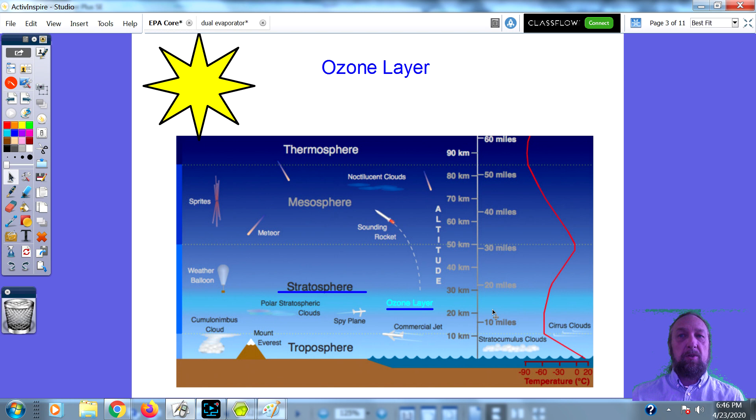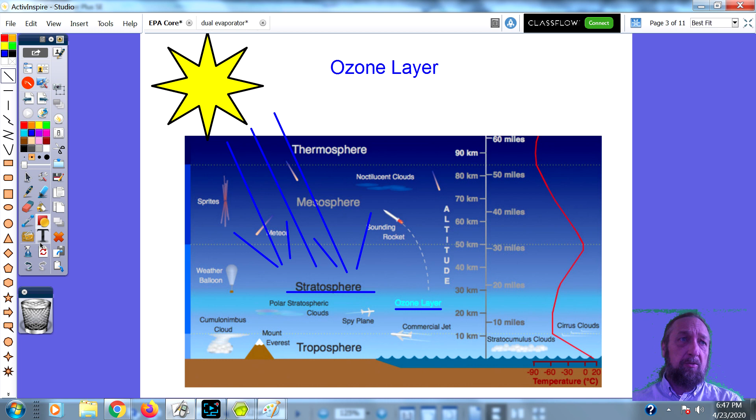So ozone, as thick as it is, stands about 7 to 10 miles above the Earth, and you can see where this little light stripe is right here. This area is where the ozone layer is. So as the sun's rays are penetrating into the Earth, these ultraviolet rays here are trying to get into our atmosphere. But when they hit the ozone layer, they are reflected out and away from the Earth. So it protects us. And what are we concerned about? Well, the ozone layer protects us from the ultraviolet light. Ultraviolet light can cause all kinds of problems. It can cause skin cancer.

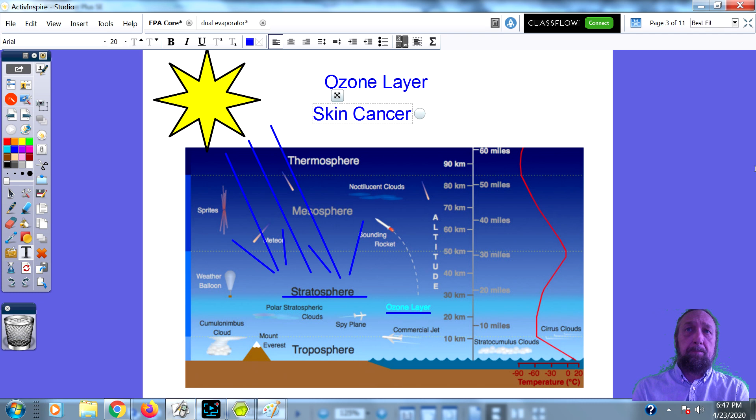They can cause cataracts, and I think it's spelled that way, cataracts. It can reduce crops, and it can reduce marine life. So in other words, too much ultraviolet radiation is no good.

I just installed one of those UV lights in the air conditioner in the office because of this COVID virus, and I was trying to kill the germs in the AC by using an ultraviolet light. That is how they do it on air conditioning units. And I got a little UV handheld wand. It looks like a lightsaber from Star Wars. And you hold that over the keyboard for like 10-15 seconds, and it kills all germs. So that's a good thing about the UV.

But the skin cancer here is probably one of the worst things that could happen. You go out in the sun, and if you get too much sun, they say, oh, you're going to get sunburn, be careful, you can get skin cancer and everything else. So if you pay attention to the news, sometimes in the summertime they'll tell you the UV rating is this or the UV rating is that. That's based on how thick the ozone layer is.

So what is happening? Ozone has 3 parts of oxygen like you see here, and Freon contains chlorine in some of the Freon that we have, R12, R22, R11, R500. All these refrigerants are made up of different types of chemicals, but they all contain some sort of chlorine atom inside of it.

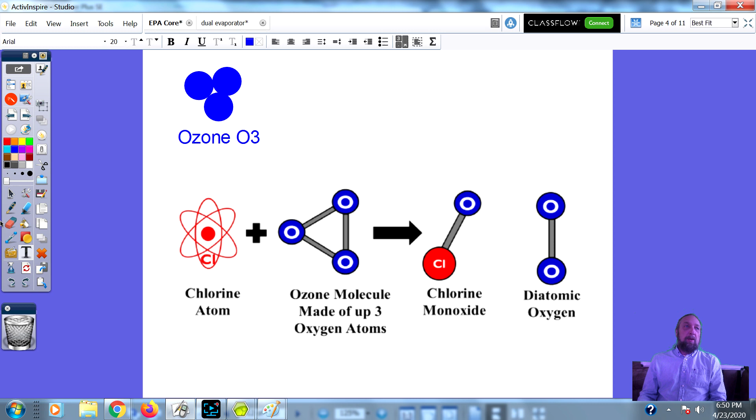Now they're saying that this chlorine atom can destroy up to 100,000 ozone molecules. Okay, so this chlorine atom meets here. This oxygen meets another oxygen, becomes an O2. Then the chlorine itself comes right back around and breaks up another ozone molecule and steals another oxygen atom out of there. And this can happen up to 100,000 times.

So if you're writing this down, this is the stuff you need to know for the test. You need to know it's chlorine that messes up the ozone. The ozone's made up of 3 oxygen atoms, and chlorine monoxide is the chemical formed when 1 chlorine atom is mixed with 1 oxygen atom. So chlorine monoxide, mono meaning 1 oxygen. And you need to know 100,000 ozone molecules can be destroyed by one chlorine atom.

And that sounds like a lot. If I gave you $100,000, that'd be a lot of money, right? But you cannot physically see an atom with your eyesight. You have to see it with a microscope. So 100,000 atoms, I don't know how much that is, but I would gather to say it's about the size of a ballpoint pen. It's not really as big as you think it is. But if you get enough chlorine out there and multiply it, instead of being 100,000, it's millions and millions.

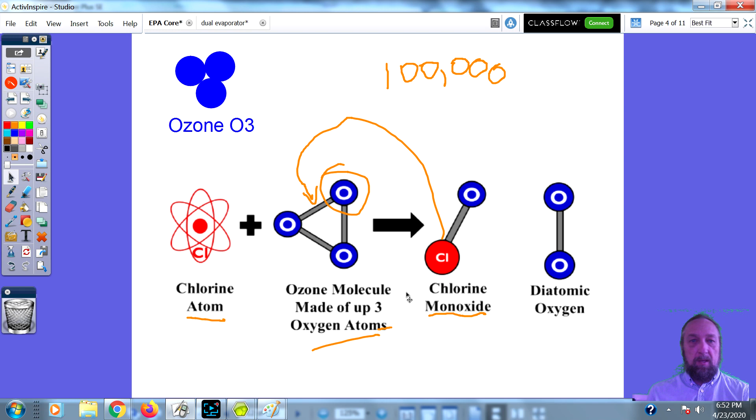Now, what makes ozone is usually lightning. An electrical charge: if you were ever close to a lightning strike, you'd smell a little bit of a pungent smell. That is the electrical charge in the air fusing oxygen atoms together to make an ozone molecule. But ozone at Earth level does not protect us. We need that ozone at the stratospheric level. So it's not that easy to replenish, but it's not that the entire world has a hole in it; there are spots in the ozone layer that are thinner than others, and ultraviolet radiation can get in.

So let's take a look at a couple of the questions here in the exam. The first question says, which of the following gases help form the Earth's protective shield? So what's the answer there?

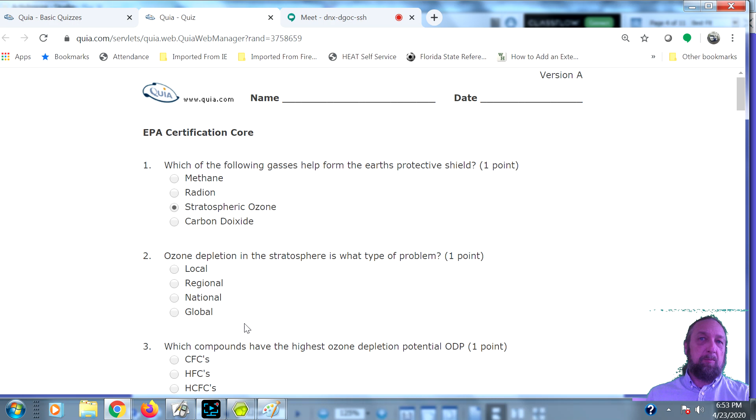That's the same. It's stratospheric ozone. Okay? Now, ozone depletion in the stratosphere is what type of problem? Global. It's a global problem. Okay? Now, let's talk about ozone depletion potential. I have that in my presentation.

Refrigerants ozone depletion potential. We have CFCs, HCFCs, and HFCs. And in our old paperwork, those were the only three refrigerants that we talked about. But now we've added HFOs. That's 600A. Now, CFCs are chlorofluorocarbons, and those are refrigerants like R11 and R12. We don't use them anymore. They've been phased out and they've been replaced.

Do you know what they were replaced with? Isn't it butane? Well, what freon do we use in a refrigerator? 134A. R134A. So yeah, the R12 was replaced with 134A. Okay? Now we have HCFCs, and those are like R22, R502, and some of these other refrigerants.

What about R600? Isn't that new? Okay, that is part of the HFOs, and I haven't got to that yet. Before I get to the HFO, I want to talk about the ozone depletion potential on this screen. The higher amount of chlorine that a refrigerant has, the more ODP, and you're going to see ODP here, and that's short for ozone depletion potential. So the higher ODP, the more chlorine that's found in that refrigerant.

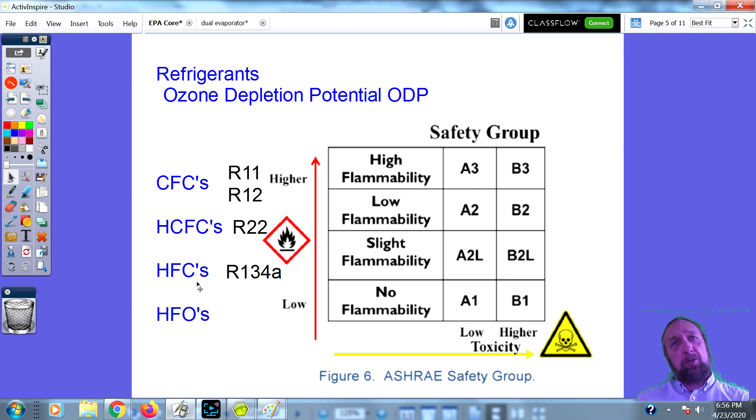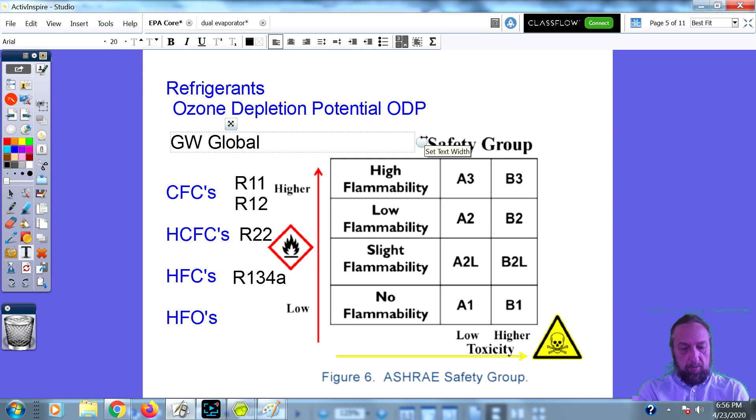But the problem with those refrigerants was they didn't harm the ozone, but they had what they call GWP, global warming. Now, global warming is not the same thing as ozone depletion. Ozone depletion harms the ozone layer and allows ultraviolet light in.

Global warming is something called the greenhouse effect. The sun heats up the earth, and that heat's supposed to escape back into outer space. But if we have refrigerants trapped in layers of atmosphere above us, it keeps that heat in, almost like putting aluminum foil around warm food to keep it warm. So the sunlight heats up the earth, and the earth gets warmer. You hear a lot about presidents and everybody saying we've got to worry about global warming. So we don't want to let 134A out into the atmosphere.

A lot of people say, well, if it doesn't have chlorine, it's not going to harm the ozone, why worry about recovering that refrigerant? But it affects global warming. So HFOs were invented, and that was R600A. These refrigerants have been around in Europe for almost 20 years now. They contain isobutane, which is what's inside your lighter, and that's very flammable. Its flammability was not that high, but its global warming was a lot lower than R11, R12, R22, R134A. That's one of the reasons we're now changing from 134A to 600A.

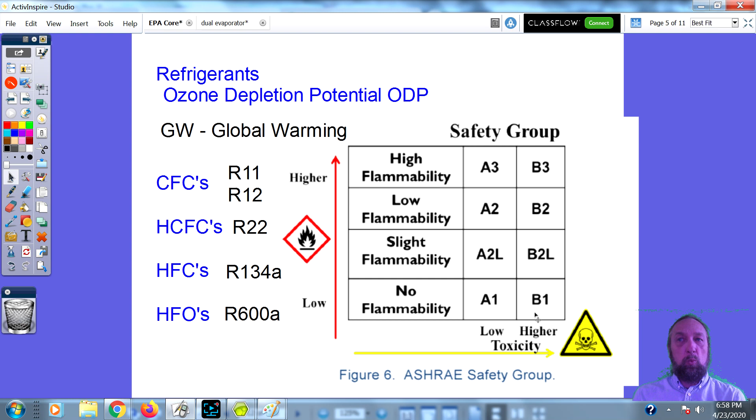Now let's take a look at this chart over here. This chart talks about flammability, and down here you've got what they call toxicity. All of these refrigerants, HFCs, CFCs, and HCFCs, are what they call an A1 classification, except for R123. That is a B1 classified refrigerant. I'm going to put that up here, because that will probably be a test question. R123 is a B1 classification. It means it's a little bit toxic. It's not going to kill you if inhaled, but it can cause serious respiratory problems.

With A1 refrigerants, if I let Freon into the air, and I don't totally replace the oxygen with Freon so you pass out, if you inhale it, it's not going to harm you. It's odorless, it's colorless, and it's not toxic to you. So in the column on the left, A1 is the safest refrigerant, but as we go up in numbers, we've added flammability, where A2L is slightly flammable, A2 is low flammable, and A3 is highly flammable.

R600A is an A2L. I haven't seen the new test myself, but you might want to jot this down, that R600A is an A2L. So it's slightly flammable. If you let it out, it'll burn, but it's not supposed to be really high explosive or anything else like that. So most refrigerants are A1 except for 123, and 600A is an A2L. You need to know those two numbers for the EPA test.

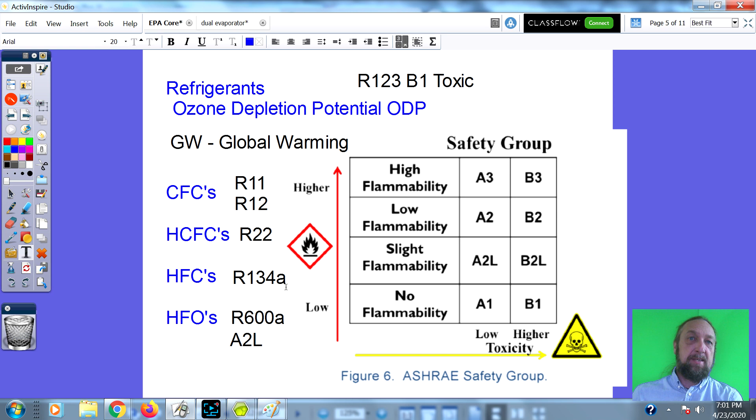So going through here, let me just see, drop-in refrigerants. Let me talk about that next. When you're working on a system, and that system has R12 in it, and I said that 134A is now being used instead of R12. So 1970s, 1980s, 1990s, we made refrigerators with R12 gas inside of them. And then the government said, hey, no more R12. So manufacturers had to redesign their refrigerators to use 134A. So they stopped making R12.

Well, R12 and R134A use different types of oils, and those oils can't be mixed. So if you were working on an R12 system and it had a Freon leak and you took a torch and soldered up the hole and fixed that leak, and you don't have R12 now, you technically can't just put 134A in. Or if you're low on Freon, you couldn't add a little bit of 134A. If you do that, you end up mixing the refrigerants, and you're making something called a blended refrigerant.

So going to drop-in refrigerants, when retrofitting or converting a system to use a different refrigerant, only EPA-approved substitutes can be used. Remember, EPA does not approve any substitute refrigerants as direct drop-in replacements to service an R22 or other system. So let me just do a search here for an R134 blend equivalent. Okay, so R134 is a refrigerant, but you might find some of these other gases that are very similar in pressure and can be used similar to 134A.

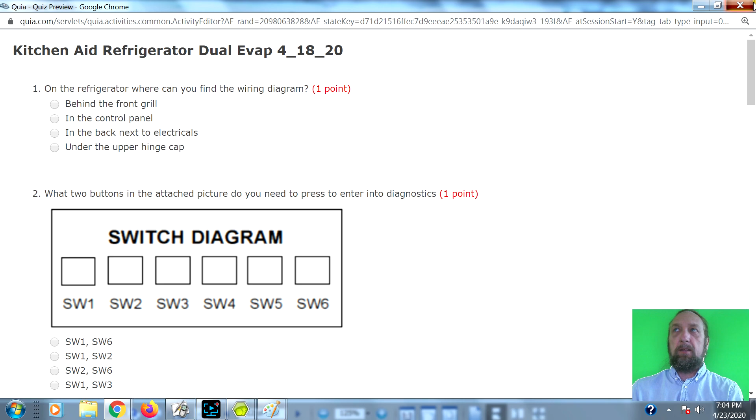I'm going to close this one. If we're looking here at the quiz, which compounds have the highest ODP? CFCs, HFCs, or HCFCs? Anybody? HFCs? CFCs. They might add HFO as an option in here as well. Which refrigerant contains CFCs? I gave some examples. If you look at the presentation... I didn't write it down. Oh, no. Is it R22? 500. Did you say 500, Gerald? That's correct. Yes.

R500 is a CFC. An example of a CFC refrigerant is, and it was on that list, what was an example? R22. No. Another guess. R12? R12. What about an example of an HCFC refrigerant? I'm looking on the slides. I'm sorry. So it's R22. Well, what's the question? HCFC is R22. Very good. Which refrigerant is a chlorine-free refrigerant? Just look at the name. The first C in the name was chlorine, and the second C was carbon. Which one of those doesn't have the chlorine in it just by the letters?

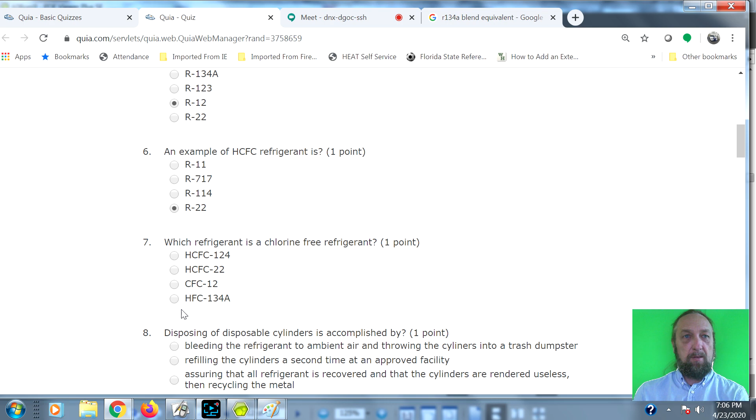Gerald, minimize. Turn off your microphone. You're getting noise in the back.

Okay, so let's go back to the presentation. So you can see the types of questions they're going to ask you is which refrigerants are CFCs and HCFCs. A lot of the temperature pressure charts, and I think I emailed you guys one, right? Yes. Let me go to that temperature pressure chart if I can open it up.

Chris said he's not going to be able to make it, by the way. Huh? Chris said he wasn't going to be able to make it.

Okay, no problem. So look at this temperature pressure chart. Look, HCFC, HFC, HFO, CFC, HCFC, HCFC, you get the point. So HFOs don't have chlorine and HFCs don't have chlorine. You don't have to memorize the letters and the numbers because you are allowed to use a temperature pressure chart when you take the test.

So if I give you a copy of this for the test, you have to say, oh, which one doesn't have chlorine in it? It would be 134A, 600A, 1234YF, and 1234ZE. All those don't have chlorine. So if they're one of your options in the test, if you learn how to read what these letters stand for, you don't have to memorize which one of the numbers are the refrigerants that have chlorine and don't have chlorine.

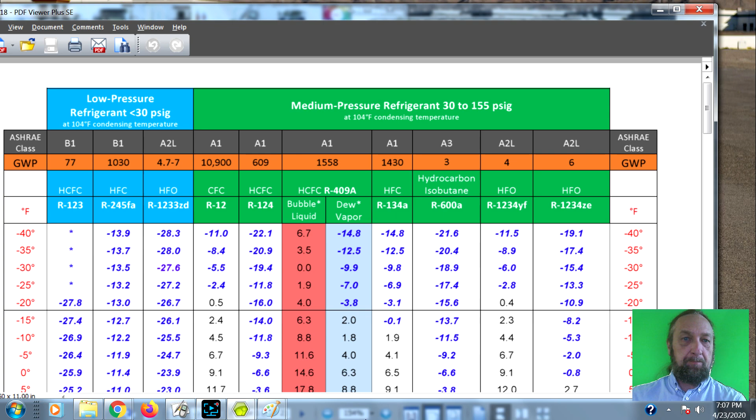Also, this 1233ZD is also what we call an HFO, which is a hydrofluoroolefin. So let's go back to here. Disposing of disposable cylinders. So when you buy Freon and it comes in a tank, that tank is a disposable tank. That tank cannot be used for recovering.

Sometimes back in the day, guys used to take and use them for air tanks. They'd pump air into it, and if their bicycle tire got low on air, they'd use it to fill air. But they're very dangerous because the valves inside of them aren't designed for charging and letting the pressure on and off. So disposable cylinders are what they are.

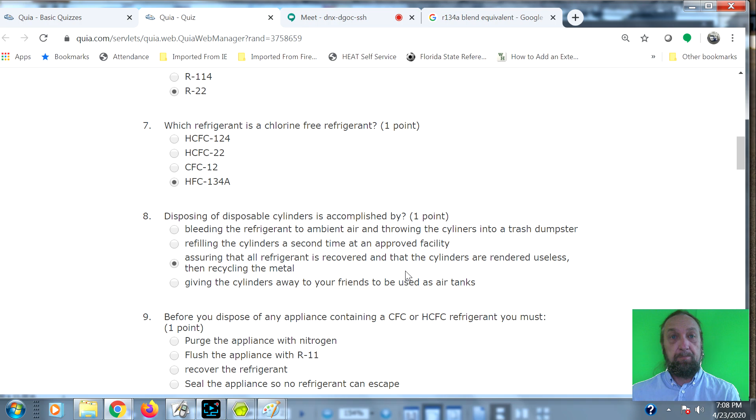They're disposable. So when you get rid of it, you have to make sure that all the refrigerant has been recovered from the unit and the cylinders are rendered useless, and take them to the metal recycling place so that someone else can't use that tank because it is dangerous. All right? Yes?

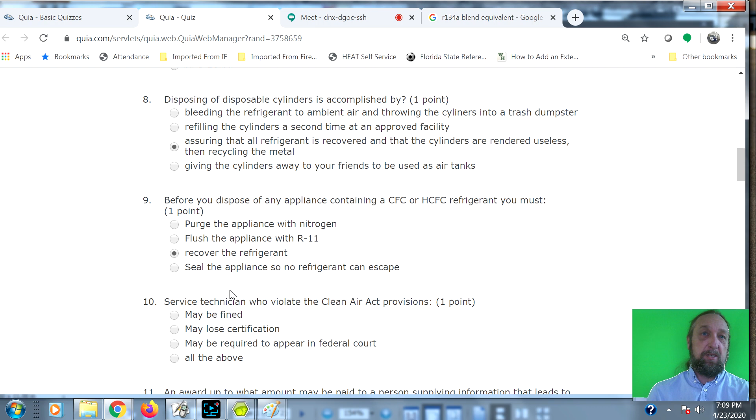Okay. Before you dispose of any appliance containing CFC or HCFC refrigerant, you must do what? Read the choices. Recover the refrigerant? Yes, to recover. And you guys, every time you work on a refrigerator, if you got to do a sealed system job, you always have to recover the Freon from there.

Okay? What do you think would happen if you violate the Clean Air Act? Like you intentionally let Freon out, you cut the lines while they're fully charged, you don't recover. Which one of these choices do you think is the correct answer? All of the above. Now here, an award up to what amount may be paid to a person. Now I was looking at it in the book. I think that number has changed.

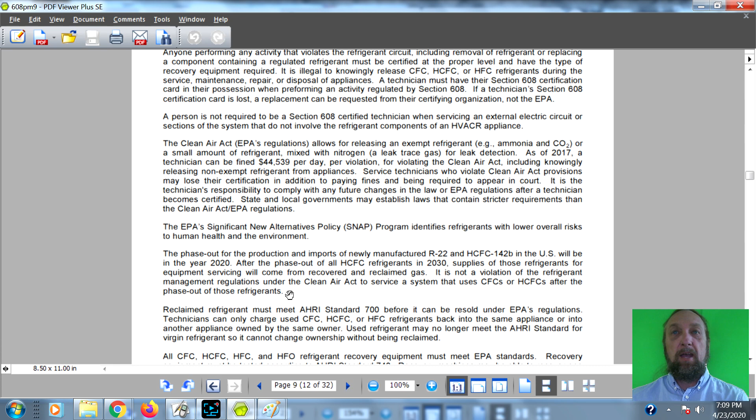Violation of the Clean Air Act. Now, a technician can be fined $44,539 per day per violation. That used to be $25,000 a day per violation. And let me tell you, I remember reading in magazines, Sears technicians got busted, and one tech got busted for doing 3 sealed system jobs in one day. So that's $25,000 per violation. So if he had 3 violations in one day, that's $75,000.

Now, if he did it a couple of times in a couple of days, that could be a lot of money. I tell you what, if one of the guys in my company did that, they wouldn't be working for me no more. Okay? But how do they catch you? How do they know whether or not you recovered the Freon? The guy just walks up on you in the customer's house while you're working on a fridge and says, aha, I got you.

What happens? Well, they have to check your tank. You got to be recovering it in a tank. You can't just be letting it loose. Yes. No? It's not just the recovery tank. They can weigh the tank to see how many ounces or pounds are in there. Yeah. But you are required to have a recovery log.

The recovery log, you put down the customer's work order, the customer's name, you put down how much Freon you recovered, and if you put Freon back into the system, did you use the recovered Freon or new Freon? So you could recover 4 ounces from the refrigerator, change the compressor, and reuse those 4 ounces back in the refrigerator. There's nothing wrong with that. That means your tank's empty, but your paperwork reflects it. So if you get pulled over, you got to have a recovery log stating that.

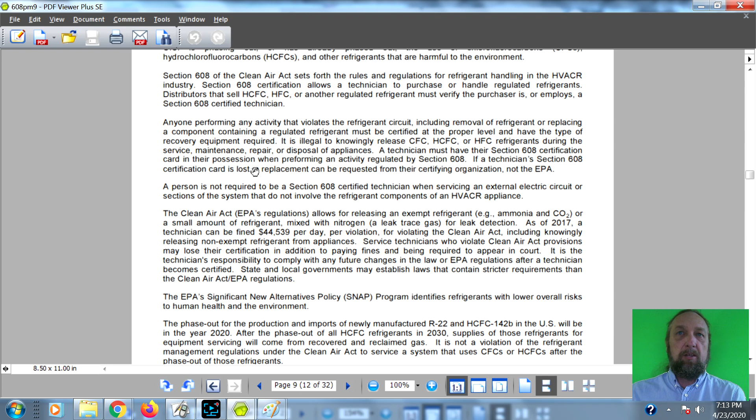So going back to the question here, on the test, it states an award can be paid up to a person. I did not see that in the book. The book said how much the violation is, but it did not state what the reward is. I'm assuming the reward is probably still the same as before, which would put it at $10,000 per violation.

So if you saw a technician working on a product, and he hooks gauges up to an AC and runs the other hose into a jug of water and you see it bubbling, he's probably letting Freon out. Water is not a good way to catch the refrigerant. So you call EPA and they're going to follow that guy, and the first thing they're going to ask him is, let me see your recovery log. Even if he had a log, they're going to weigh his tanks, and if his new refrigerant tank and his old tank match up to what his logs say, then he's okay.

If it doesn't match up, he's going to pay a fine. And if he gets a fine, you could get up to $10,000 as a reward for turning them in.

So now number 12, the answer has to change, because it used to be 25,000, but the answer now, as we have here in the manual, is 44,000. Why 539? Why did they make it 500 or 600? I don't know, but they made the fine higher as of 2017, to almost $45,000 per violation. So they're really strict about you letting Freon out into the air and making sure you don't do that.

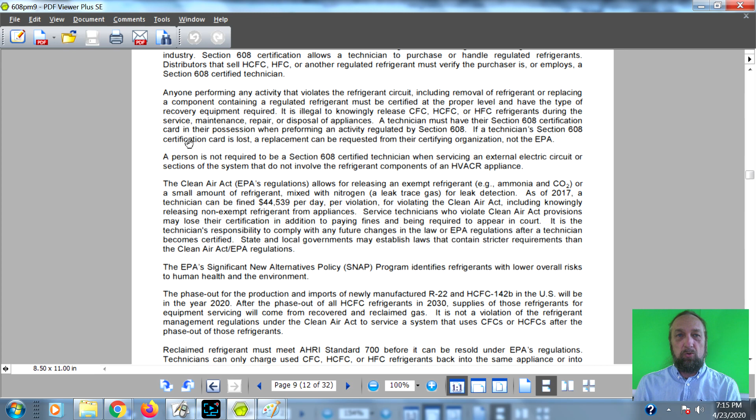I keep going to the wrong screen. I'm going to put 25,000, but I'm going to change this test question to say $44,539. Okay, let's go to question number 13.

Chlorofluorocarbons, or CFCs, and hydrochlorofluorocarbons, HCFCs, have the following similarity. What do you think is similar between the two refrigerants? They have the same ozone depletion potential? No, they don't. The CFCs have a higher chlorine content than HCFCs, so they have a higher ozone depletion potential.

But they both must be recovered before opening or disposing of an appliance. So before you service the appliance or throw it away, you're supposed to have that refrigerant recovered. If a residential customer's refrigerator breaks and they buy a new one from Best Buy, then throw the old one in the back of their truck and go to the scrapyard, the scrapyard will tell them to put it on the side. They will not allow you to throw it in the dumpster. Then it's the scrapyard's responsibility to recover that refrigerant before the refrigerator is completely disposed of.

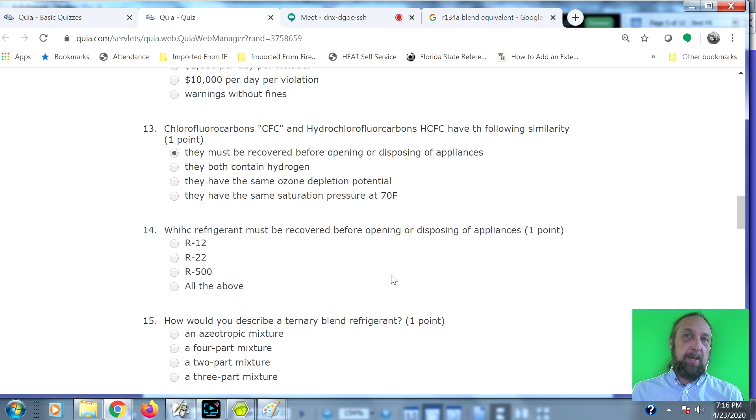Okay, I see a lot of typos here. The question asks which refrigerant must be recovered before opening or disposing of an appliance. The answer is all of the above.

Okay, so let's get into the presentation again. Let's take a look at azeotropic refrigerant mixtures. They contain two or more refrigerants at a certain pressure. An azeotropic mixture evaporates and condenses at a constant temperature. It acts like a single component refrigerant over its entire range. Thus, azeotropic mixtures act as a pure compound. What the heck are they saying there? Any idea?

Okay, if you look at R450A, it's a near azeotropic refrigerant blend containing HFO refrigerant designed to replace 134A.

So you cannot make your own blend, but I'll give you an example. If you mix R22 and R500 together, if we go back to that temperature pressure chart... well, let's say R12 and R123. Let's say we mix those two together.

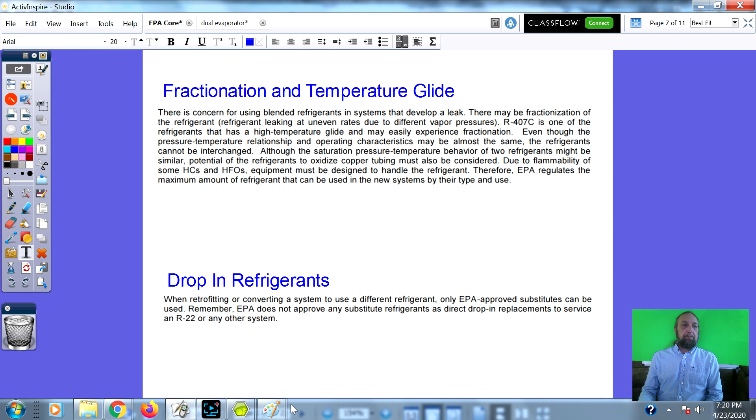So the problem with a blended refrigerant is if you have a leak inside the system, it might leak unevenly. And if it leaks unevenly, let me just do a little drawing here so I can give you an example. So let's say this is a container, right?

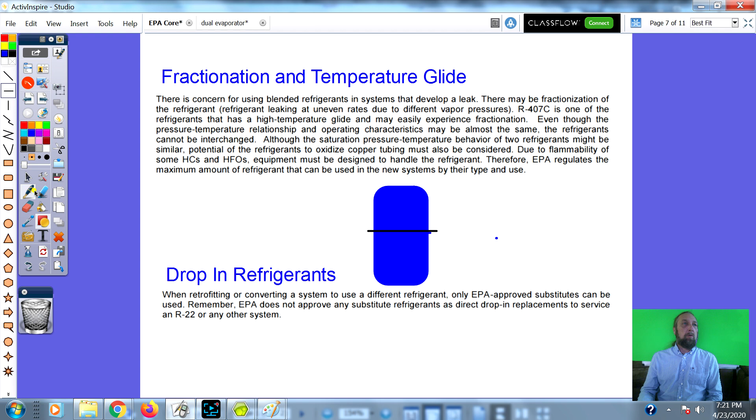I'm going to draw a line cutting this container in half, okay? It'd be better if I drew a different color. So this half on the bottom is water, and this half on the top is oil, right? So if I put a little tiny hole in the side of the container here, which would run out faster, the water or the oil?

The water? The water, because it's thinner than the oil. The oil's thicker. So if water would run out faster, then if I tried to mix it back up, it's not going to be the same mixture it originally was. It's going to have too much oil and not enough water.

Blended refrigerants are the same thing. If you have a leak in a blended refrigerant, it's considered fractionation. And what happens is, as the freon's flowing through a refrigerant system, it may have too much of one gas than the other and have a high pressure. And then when that gas leaves and the other gas gets a lot of that gas there, it might be a lower pressure. So you're going to have a range of temperatures and pressures at one given point.

And that's called temperature glide. So two words you need to know are fractionation and temperature glide. The main thing is fractionation is when you have a refrigerant leak that's a blend that leaks, that you'll have more of one refrigerant than the other.

In order to charge that thing to get it back up to the right pressures, you cannot just add that blend back in. You would think, oh, well, if it leaked out, the blend had a leak, I can just get that same refrigerant blend and connect it to the system and charge it back up. Well, the problem is if it was like oil and water, and I lost more water than oil, and then I took a pre-mixed blend that was already properly mixed, what's in there is still not an even blend. So we call that fractionation.

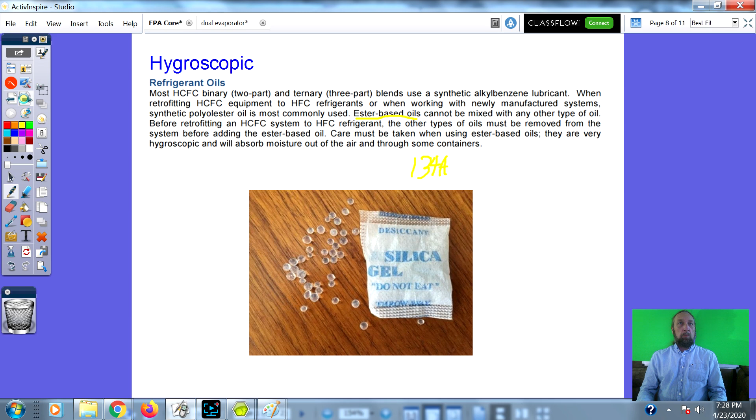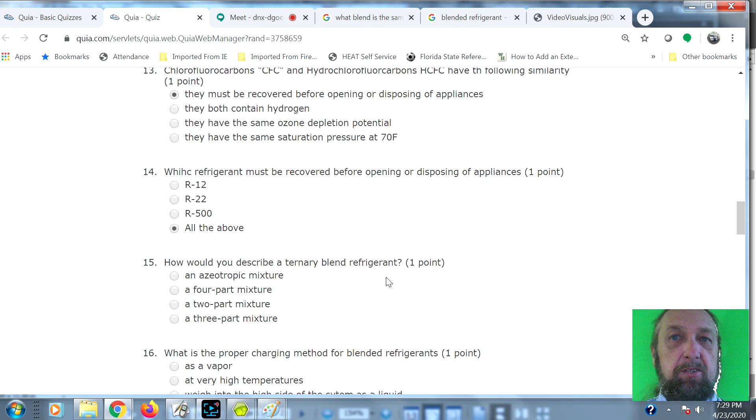So let's take a look at the EPA questions. How would you describe a ternary blend? Just think of the word ternary. Is it a 4-part blend? No, ternary is like tricycle, a 3-part mixture. So it's a 3-part blend.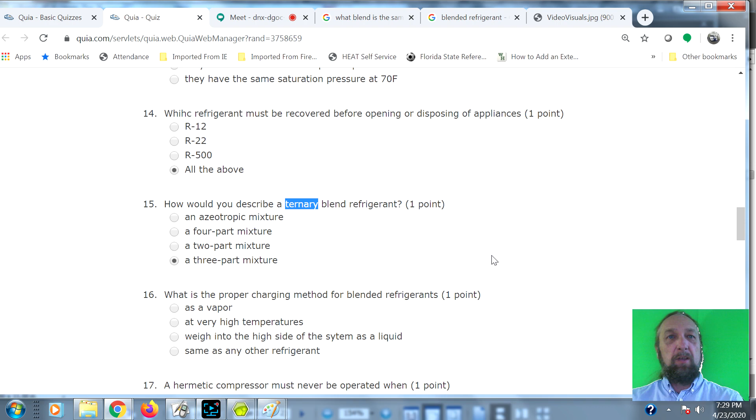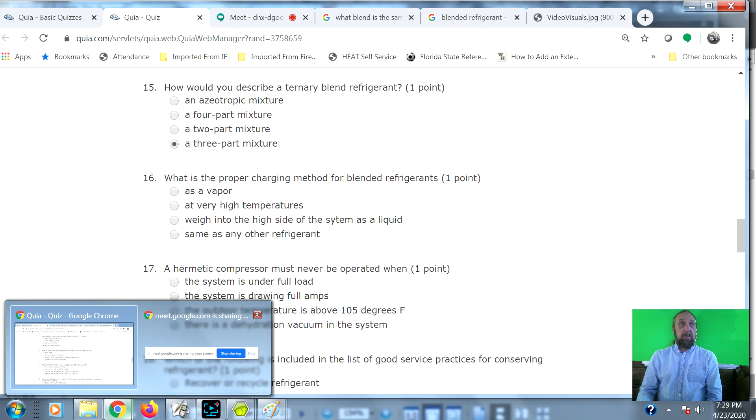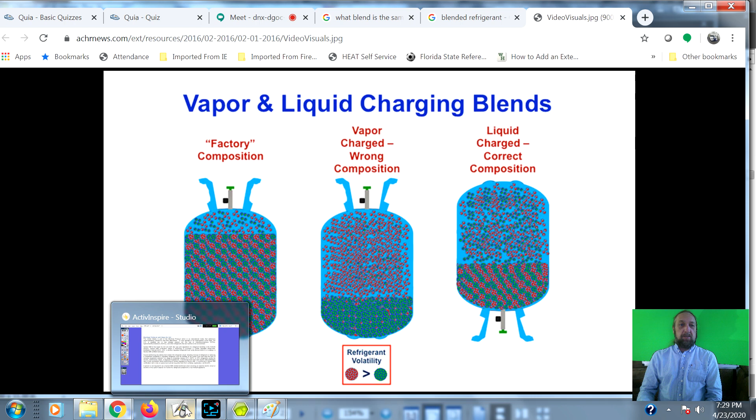What is the proper charging method for blended refrigerants? As a vapor? No, look at it right here. Liquid charging is the correct charge. So when you're charging with refrigerants that are blended, you want to charge with liquid, and you weigh into the high side of the system with the liquid.

Now, a hermetic compressor must never be operated when there's a dehydration vacuum in the system. You don't want to run a compressor when it's under a deep vacuum. The compressor is inside of a steel shell, and it has an electric motor inside of it. Most dryer and washer motors are open, you can see the windings, and the reason they're open is so that if they get hot, air can cool them down. Well, a compressor's windings are inside of a steel shell, they don't have any place for that heat to go, so it relies on a flow of refrigerant flowing over the compressor to help cool it down. If you've got the system in a vacuum, like you hook a vacuum pump up and suck all the air out, you don't want to run the compressor because you have no refrigerant in there, and you need that to keep the compressor from overheating.

So that's why a hermetic compressor should never be operated when there's a dehydration vacuum in the system.

Now, which of the following is included in a list of good service practices for conserving refrigerant? Do you think all of that, you should? All of the above. That's right. You should recover, recycle, keep the system tight, make sure there's no leaks, find and repair leaks. All of the above, yes sir. Okay, removing refrigerant.

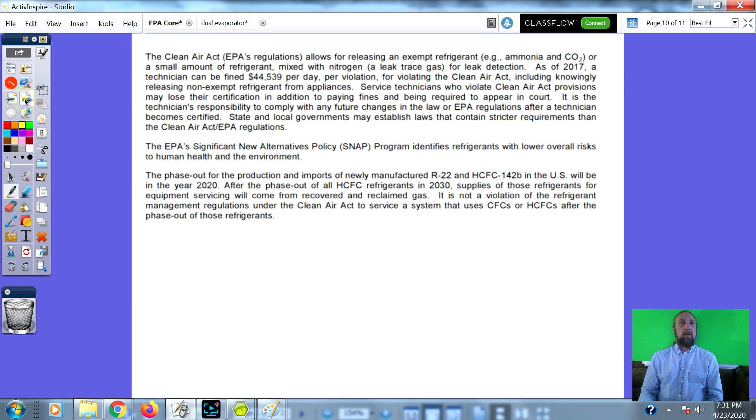Let's talk about the 3 R's: recover, recycle, reclaim.

Recover is, you have a refrigerator and you have... Gerald, mute your microphone, please.

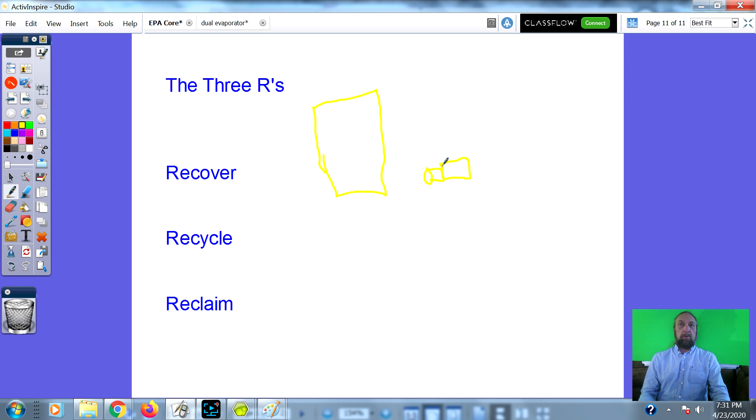You have your refrigerator, you have your recovery machine, and you have a tank. Recover is to take the Freon and use a recovery machine and pump it into a tank. That's recovery, taking it out of the appliance and storing it in a tank.

That's it. Recycling - I used to have a machine that's a recycling machine. It would pass this Freon, after it's in the tank, we could hook it up to the recycling machine and it would circulate that Freon through a set of filters, trying to get moisture and contamination out of there and sort of make the refrigerant almost like brand new refrigerant. So we would recycle the refrigerant after it's been recovered. Most people don't recycle, but it is something that can be done, but the recycling equipment is quite expensive. I think back in the day I had one in the 90s that cost almost $4,000. So recycling is to filter out moisture and particles inside of the system.

Now reclaiming - you as a technician or a service company can't normally reclaim your own refrigerant. You need to take it to an EPA approved company, and that company would recycle it, but they would guarantee it as reclaimed refrigerant and then sell it like brand new refrigerant. So they reclaim it and sell it as brand new refrigerant.

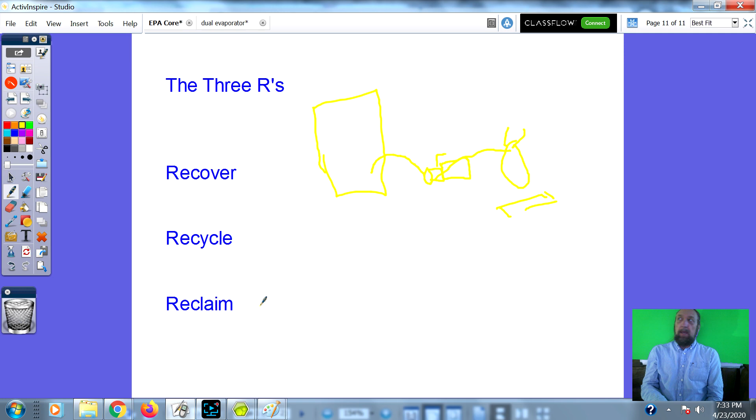So let's look at the test question. Remove refrigerant in any condition from a system and store in a container without testing or processing in any way - is what?

Recovering. Recovering, correct. So taking it out, not processing it, or not doing anything is recovering. Which of the following leak detection methods is considered the most effective for locating the general area of small leaks? A halide torch, a bubble test, electronic, or audible sound. All of them are leak detectors.

An electronic or electronic ultrasonic will get you the general area, like the condenser over here has got a leak, but it might not pinpoint it to what part is on the pipe. A bubble test is for pinpointing it. But the question they're asking you is the general area of a small leak. So the answer would be an electronic or ultrasonic leak detector. They're good, but they only get you in the general area. They're not going to tell you, especially if you're in the refrigerator or in the back of the fridge.

You want to disconnect the condenser fan when you're doing this, because if the condenser fan's running and you're leaking Freon, it might blow the Freon away so your leak detector cannot detect it. Okay? Now, recovering during low ambient temperatures will do what? Basically, if you're recovering and it's cold outside. It will slow the recovery process. Very good. It'll slow the recovery process, because the colder it is, the lower the pressure. So therefore, it's going to take a lot longer to get it out.

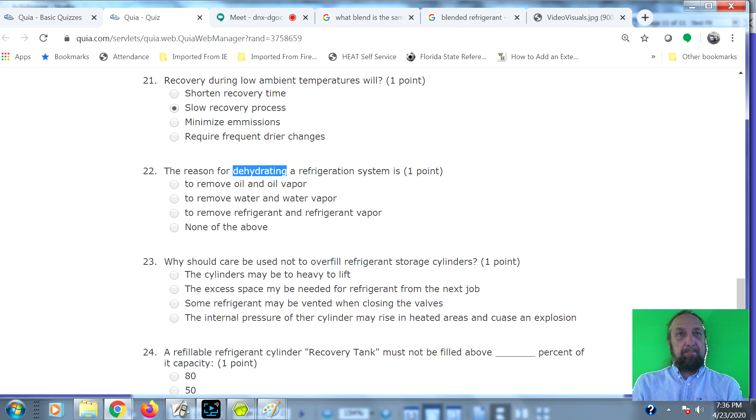Okay, the reason for dehydrating the refrigeration system is, what does it mean when you're dehydrated? You need what? Moisture, right? Yes, remove water and water vapor. Yep. Okay? Number 23, why should care be used not to overfill refrigerant in storage cylinders? The internal pressure of the cylinder may rise in heated areas and cause an explosion. Yes.

I'm sorry, I'm on my phone, so it's hard to read.

It's okay. If you try to overfill a refrigerant storage cylinder, when it gets too hot, the pressure rises. That Freon needs a little bit of space to expand. If it doesn't have space to expand, the tank is going to rupture, and that's dangerous. What about number 24? What's the maximum percentage you should fill a recovery cylinder? 50%? No, 80%. 80. Okay. 80% is an acceptable recovery, and we talked a little bit about that.

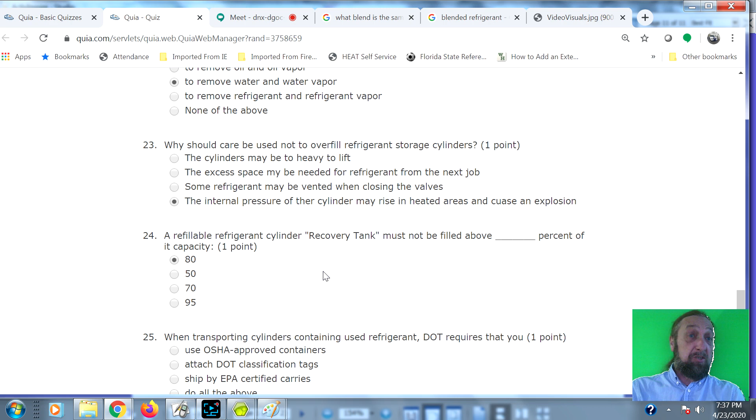Remember I said that you're going to weigh the tank when it's empty, and remember we said 24 pounds out of a 30-pound cylinder plus the weight of the tank, and that's how we know we're 80% full. Okay? And the last question, when transporting cylinders containing used refrigerant, DOT requires that you do what? All of the above. All the above. Very good, Gerald. You're going to pass this test if you keep practicing it.

So when transporting cylinders, we need to make sure it's an OSHA-approved container. DOT is Department of Transportation classification tags. Those cylinders need to be labeled. If that truck gets in an accident and those tanks are strewn out across the street, recovery people, whether it's fire department or tow truck drivers or whatever, need to know that the chemical's safe or not to deal with.

And the driver's supposed to have a manifest of how many cylinders of how much refrigerant they have on their truck, so when they're cleaning up the wreck, if the tanks go flying everywhere, they can account and say, oh, he had 100 of these, 20 of these, and 30 of those, to make sure that we didn't leave anything out. So they're required to have a manifest or a list of all the tanks and how much refrigerant they're carrying on their truck.

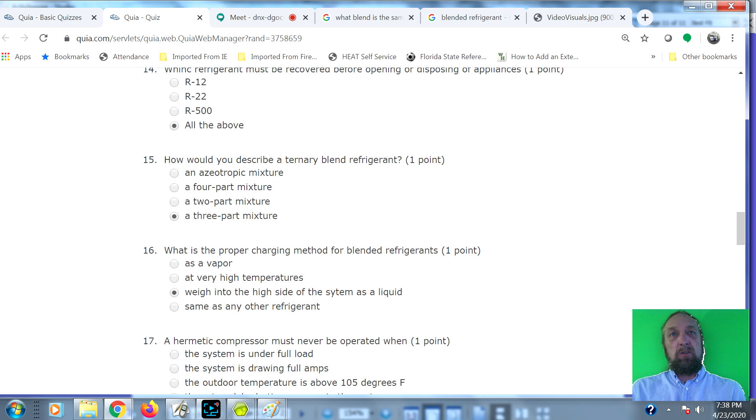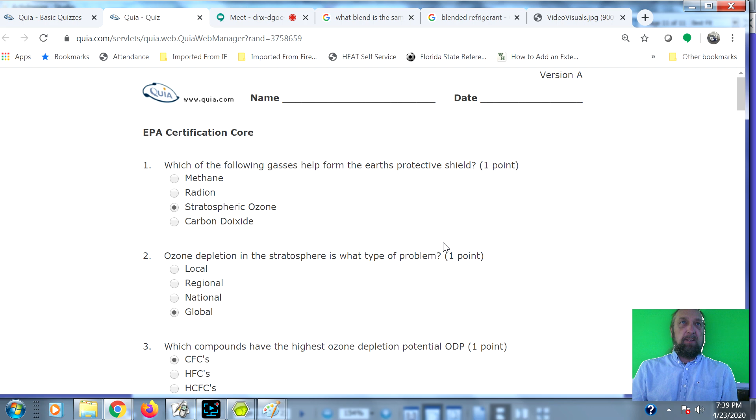All right, guys, so I went over the answers. I need you guys to practice them. I'm not going to do one tomorrow. I'll do another core lecture on Monday, and we'll go over some more material that's pertaining to this EPA test. You guys have any questions on this? Where can I find that manual?